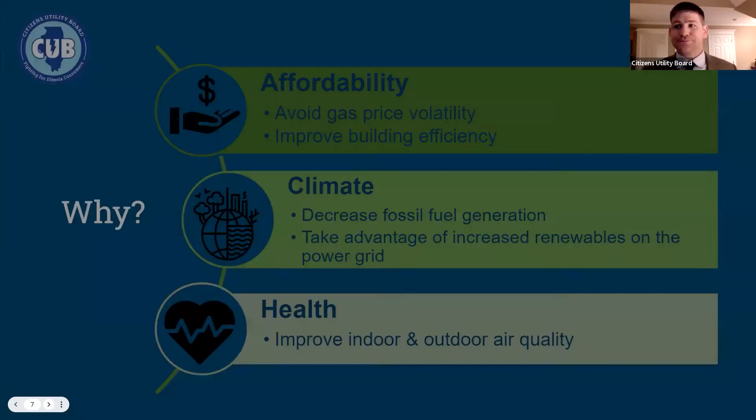As we said, the two main opportunities for beneficial electrification in Illinois are transportation—that's personal and commercial vehicles, as well as public transportation—and then buildings. We could talk about heating, water heating, renewable energy, energy efficiency, and load management. Not in today's brief, but you can also talk about zoning and how that affects the carbon related to buildings.

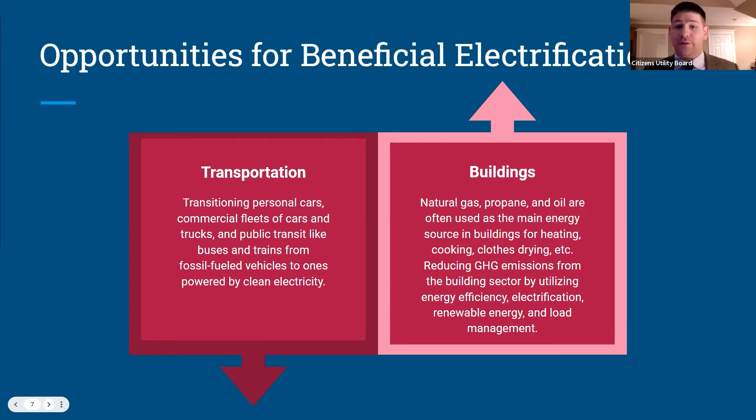So let's get started with electric vehicles. Setting a baseline, an electric vehicle is any vehicle that can drive on electricity derived from a power plug. So any vehicle that you're plugging in would be considered an electric vehicle. There is also such a thing as a plug-in hybrid vehicle, which can use both gasoline and electricity that you charge from a plug. Most of what we're talking about today is going to be the all-electric vehicle, the BEV or battery electric vehicle, that is powered solely on a battery that is charged from a plug.

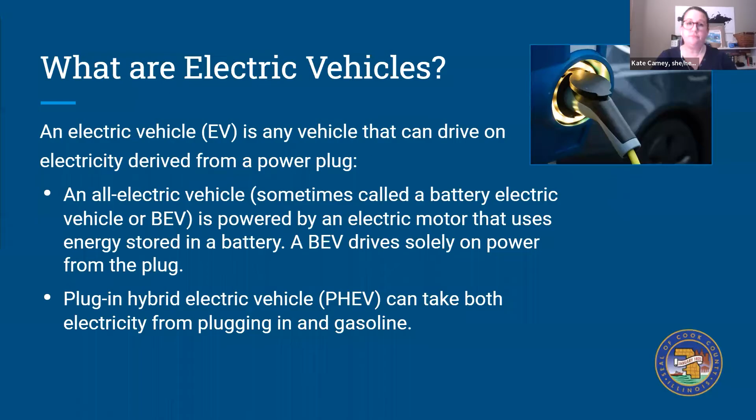There are some key features to an electric vehicle, especially these BEVs we're going to be talking about. Electric motors are usually smaller, translating to a larger interior space and a much quieter drive. Many EVs also have regenerative braking, which helps to slow your vehicle more safely and divert some energy back into the battery instead of letting it be wasted, as happens with a traditional internal combustion engine, or ICE engine. There's also instant torque and no gears to grind, which helps give a much smoother, quieter drive with a lot of get up and go. All EVs go from stopped to moving very quickly and easily.

This is a demonstration of the difference between an internal combustion engine vehicle and an all-electric vehicle. There's a lot less going on at the front of the car, and most of the batteries are at the bottom, giving it a much lower center of gravity, which is useful for a lot of different reasons. Additionally, the motor and everything associated with it are a lot smaller and lower in many electric vehicles, so many EVs have a frunk and a trunk, giving storage space in both the front and rear of the car.

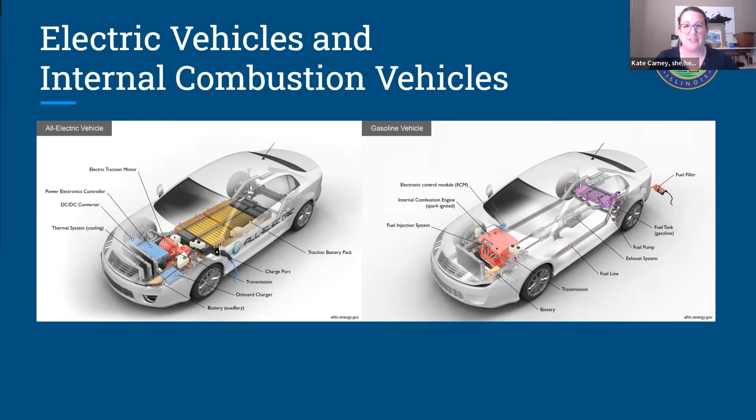So why would we want to talk about electric vehicles? Why does the governor want to have 1 million electric vehicles on the road by 2030? There are a lot of reasons, but the ones that most resonate with us as consumers are, first and foremost, a lower cost of ownership. Many electric vehicles are getting more and more comparable to traditional internal combustion engine vehicles in cost, and there are so many fewer maintenance needs because there are so many fewer moving parts in an electric vehicle's motor versus an internal combustion engine and all its associated parts.

Because of regenerative braking, the brakes usually last longer. There are also state and federal tax incentives and rebates that help further bring down the cost of owning or purchasing the vehicle. The equivalent cost per mile for an EV is a lot less than for an equivalent mile of gasoline. Right now especially, electricity is far less expensive than gas, and since gas is still fairly high, there's a huge difference.

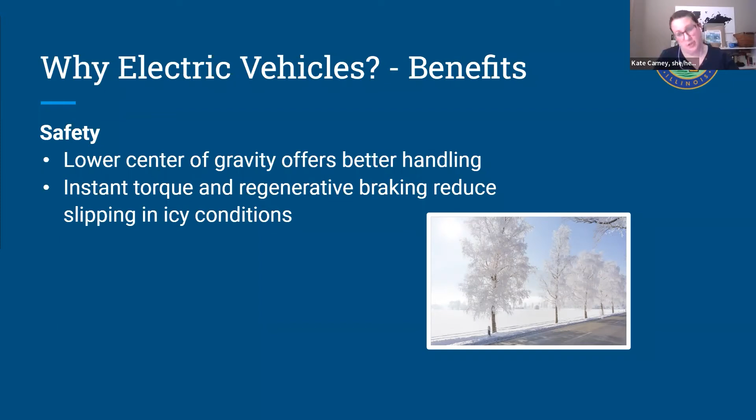Also, they're cleaner—no tailpipe means no tailpipe emissions. This really helps us reduce greenhouse gas emissions and keep particulate matter out of the air we're breathing and out of the atmosphere. These are all components of the greenhouse gases that our tailpipes emit right now: less carbon monoxide, nitrogen oxides, formaldehyde, and particulate matter, which can do a lot of damage to our lungs. This is a really important health benefit to all of us.

Also, there's a lot of charging options. Right now, this map is a rough estimate of all of the public charging stations available across Cook County. They are different levels, which we'll talk about, but this infrastructure is growing every day. More private companies are adding charging stations to their facilities for staff, employees, and customers. Cook County is currently working on a program to try to fill in some of these charging deserts where you see big spaces with no chargers currently. At the state and federal level, there's also tons of charging infrastructure coming into play.

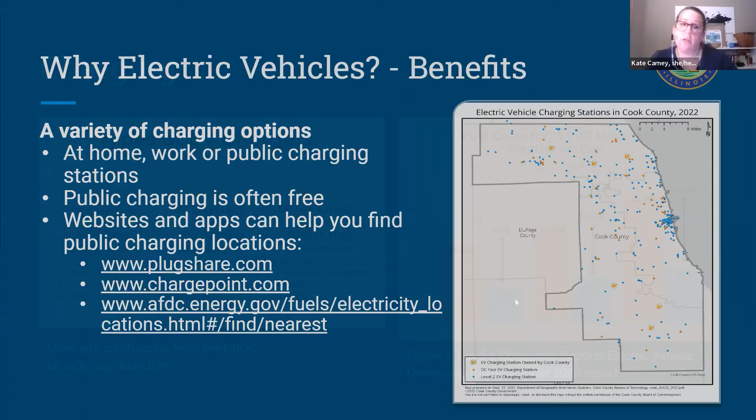So let's talk a little more about charging. There's 3 primary levels of charging stations. The first one is the AC level 1. It is a slower charge, so a lot of people describe it as kind of a trickle of charge into your electric vehicle.

This is best when you are able to just plug it right into one of your outlets, whether it's in your garage or on the exterior of your home. You're going to want to charge it overnight when rates are low and demand is low, and you have time to get your full charge back. A lot of times, if you're just doing your normal everyday driving around, this is going to charge it up pretty quickly because you haven't had to reduce your battery very low. And it's very accessible, it's just like a 3-pronged plug that you find in your home.

The AC level 2 does require that you would need an upgraded power source, but you can have that installed in your house. It's the same thing as an electric dryer plug, that's 220 volts, so it's very similar to access we already have in our homes. This one charges quite a bit faster. It's not the fastest, but you could upgrade to have this in your home, and you'll also find it in a lot of public charging stations.

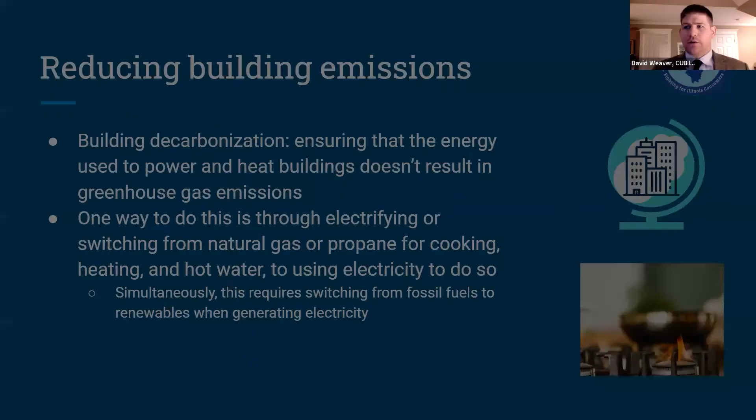There's the embodied carbon when you develop the building. Are we using concrete in the pouring of the foundation, because concrete is one of the largest carbon emissions, and everything that goes into that. We're not going to discuss that today, but it's an important part of the puzzle when we talk about building decarbonization.

Then there's the direct emissions that come from using a gas stove, using a furnace, using a gas-powered dryer in the home. You're literally burning natural gas, or in some places of the country, oil or propane, and that's a direct emission related to the building.

Then there's indirect emissions. That's when you have a coal power plant or a natural gas power plant that's burning fossil fuels and have significant greenhouse gas emissions to create electricity, which is then used by that house. So those are the 3 parts of the puzzle that we want to get after when we talk about building decarbonization.

The first and foremost, the best thing you could do is energy efficiency. The cleanest and cheapest kilowatt hour or therm is the one you don't have to use. If you have really great insulation in your home, it's weatherized, you have really efficient appliances, instead of using 100 kilowatt hours, it only uses 10, for example, that would be significant energy efficiency that can reduce emissions and save you money.

Electrification, which we're going to focus on today, that's switching from gas to electricity. Renewable generation, cleaning up that indirect emissions. Although I will point out that using electricity, even if it is somewhat created from fossil fuels, is still cleaner and more efficient than using fossil fuels to heat your home directly.

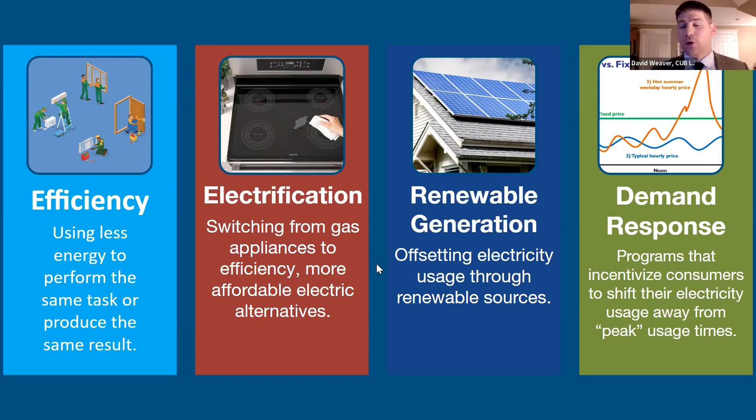So why is this so important for us in Illinois? Well, we like to take a lot of pride in our state and our city, and unfortunately, Illinois is the third worst when it comes to using natural gas. Only California and New York are worse than us, and when we consider population sizes, it's not looking good for us at all.

So why electrify? Well, let's talk about emissions over 15 years. So using a heat pump, you can see the bottom three lines, the light blue, the dark blue, and the green are all different types of heat pumps.

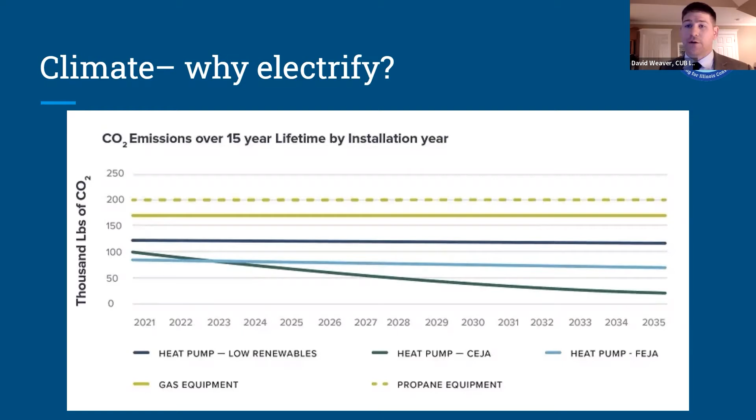The dark blue is a heat pump that's using almost no renewable energy, and it still is going to be much cleaner for the environment than burning natural gas or propane directly. So we can see over the 15-year period, switching to electric is far better for the planet.

Health—we talked about this a little bit at the beginning. A lot of us don't think about it, but when we're burning natural gas in our homes to cook, that flame is right there, and most of us don't have actual vents that take that and move it outdoors. So homes with gas stoves can have 50 to 400% higher emissions in the home than electric stoves. And the most concerning part is children in a home with a gas stove are 42% more likely to develop asthma or other respiratory illnesses.

We tend to think about outdoor air pollution a lot, but we forget to think about what's happening in our home, especially as we better insulate and weatherize our homes to keep the cool or the hot out. We're making it more difficult to get the fumes out of our homes. So it's a pretty significant issue.

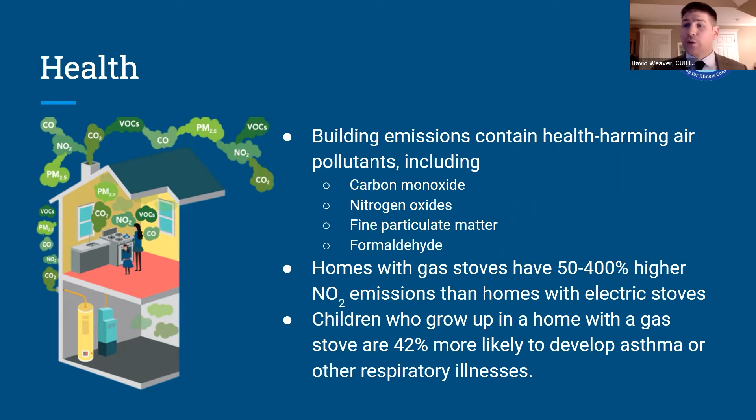There's even talk right now about a federal ban on gas stoves, so we'll see if that actually happens. Obviously, the gas industry is going to lobby to prevent that. So we'll see. But if you own your home and have a gas stove, I would highly recommend you switch to an electric stove, particularly an induction stove. We'll talk a little more about that when we get into incentives, because there's federal money to be had for that.

Affordability—let's talk wallets. As we can see, since 2020, gas prices have skyrocketed, and I hate to be the bearer of bad news, but that's only going to go up.

There's many reasons for this. Part of the problem is people are more aware of the negative externalities associated with mining natural gas. When you mine natural gas, the nearby area suffers a lot of pollution, water pollution opportunities, and an increase in earthquakes. So I think no one wants fracking in their backyard, and as more people get aware of these issues, there's going to be more local resistance to putting a mine near people.

Then there's the global gas crisis going on with the Russian invasion of Ukraine, and climate change and extreme climate events happening—all of that contributes to making natural gas more and more expensive.

And it's only going to get worse, especially because the gas companies, at least in Illinois, are asking for massive rate increases. As of last week, Peoples Gas asked for a $402 million rate hike, increasing rates by 60% since their last one in 2015. Nicor Gas requested a $321 million rate hike, all while they're already making record profits off of our backs.

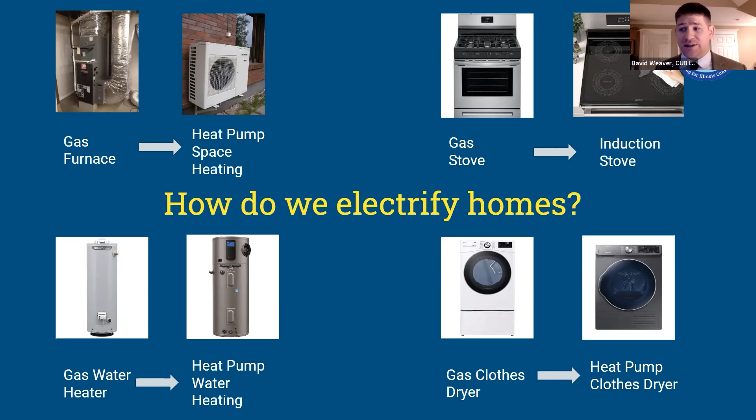So switching to an efficient heat pump, water heater, or geothermal heat pump is a great way to save money and be better for the planet. And the last thing is dryers, switching to dryers that use electricity instead of gas.

So 95% of the time, it's more efficient to heat your homes via air source heat pumps. And the few times that it is colder than -5, heat pumps will still heat your home. It'll just be a little bit more expensive than it would have cost to use natural gas. But 95% of the time, you're saving money from using the electric heat pump.

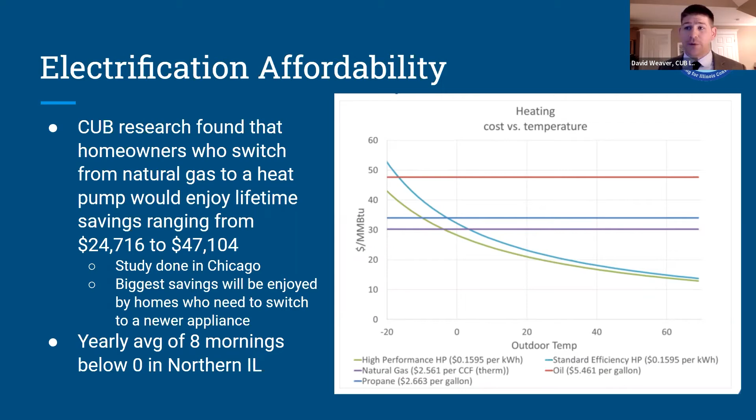So when it comes to deciding how you're going to heat your home, CUB research shows that you can save $24,700 to $47,000 across the lifetime of your heat pump to switch to it. So immense savings.

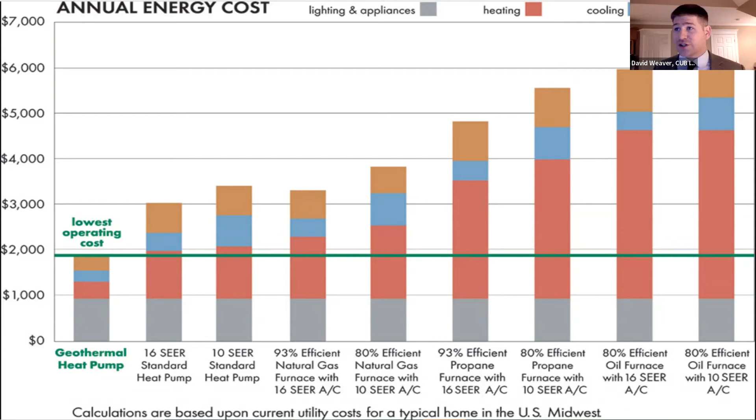Adding in geothermal heat pumps, you can see it's got the lowest operating costs of even the most efficient air source heat pumps, but certainly less than the most efficient natural gas furnaces. So it's just significant savings if you switch to heat pumps.

The IRA electrification rebates. So the Inflation Reduction Act that was signed in August by Congress allocates $263.6 million to the state of Illinois to help low and moderate income Illinoisans transition from natural gas over the next 10 years.

So if you need to replace your furnace 5 years from now, you may not want to replace it now, because this rebate will still be available for 5 years up until 10 years from now. However, it is first come, first serve. So if we, as the state of Illinois, run through all that money, Congress isn't likely to allocate us any more, with the two different parties ruling Congress. So I would encourage you to replace them soon.

If you just bought a furnace, maybe the finances don't make sense, but now's the time to do it, even if you think you've got another 5 years on your furnace.

But if you make less than 80% of that, then you can get 100% coverage of whatever electric appliance you're buying, up to a $14,000 cap. If you're at 150% or lower, then you qualify for 50% off all the electric appliances, up to a $14,000 cap. So a little bit more nuance to how these apply versus just the 30% everyone gets for the tax credits, but pretty important, and that tool is very helpful.

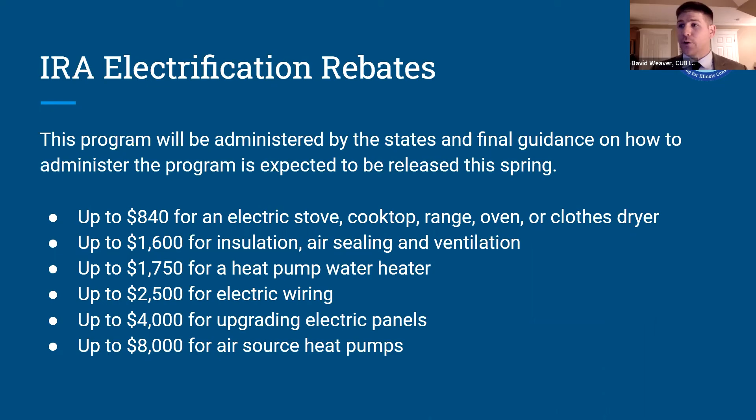Renewable energy - there's also tax incentives for rooftop solar. I'm also going to talk about community solar, even though it's not a part of the IRA. And the IRA also provides incentives for geothermal and batteries.

So rooftop solar - right now I truly believe there's no better place to install solar panels on your roof than Illinois. We don't just get the federal incentives, we also get state incentives. The federal investment tax credit is 30% of the cost of installation of your solar panels, and it is a tax credit. So if you're not making enough taxable income, this might not help you, but if you're making some taxable income, just not enough to get 30% back, you can use some of it this year, some next year. It does roll over, so very helpful.

Then on top of that, the state of Illinois has solar renewable energy credits, or SRECs. This is through the Illinois Shines program, which was passed with the Climate and Equitable Jobs Act. It usually covers between 30 to 40% of how much your system will cost you. So that's 60 to 70% off your rooftop solar panels between the federal and state incentives. It's a no-brainer - this is the time to do it. There's no better state in the union that has this great incentive program.

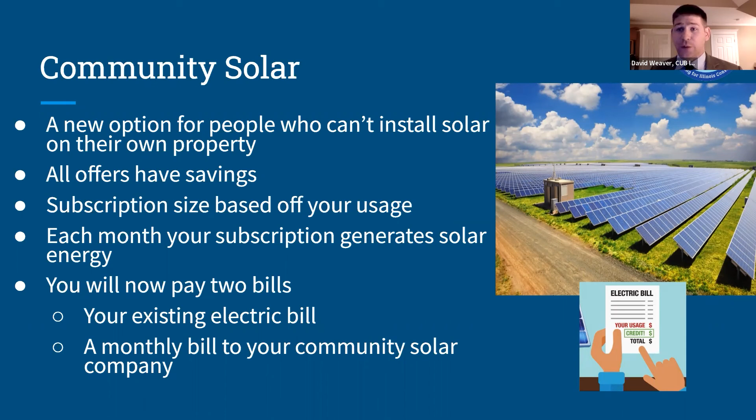Most people in Illinois save $10 to $20 who participate in community solar, and fortunately in ComEd territory, it's very safe. There's a few wrinkles to this program - if you have a municipal electricity source, you really need to check the work on that, and happy to give us a call and we'll talk you through it, because you might not save money if you have municipal solar. That's just the big wrinkle to discuss if you do have that. But if you just have ComEd, then this is a great program for you, and I highly recommend it. Everyone should sign up for this because $10 or $20 every month adds up very fast.

This is what I was talking about - you'll get an electric bill that has minus $50, but then you'll get the community solar bill charging you $40. So you'll save a net $10. It's kind of confusing because you get two different bills, but it'll save you $10 or $20. And if you have any questions, just feel free to call us on our hotline and we'll discuss it.

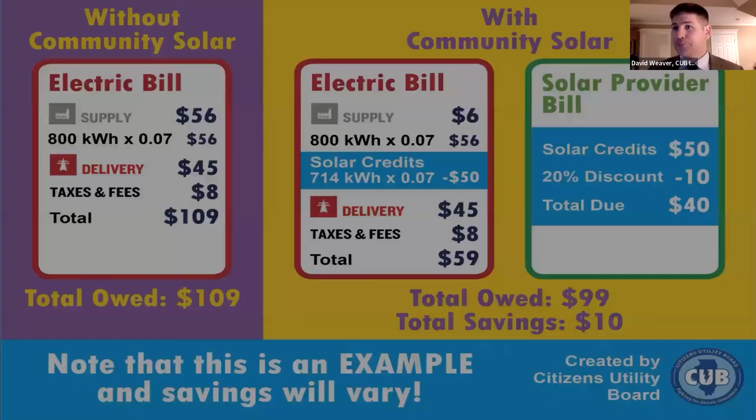Geothermal heat pumps are the most efficient way to heat and cool your home and your water. It uses the energy stored in the ground.

What it does is, when it's hot outside, it works just like your refrigerator, which moves heat outside. You can't create cold using electricity or burning gas. Those can create heat, but they can't create cold. So what it does is move the heat from your fridge and pump it out. That's why sometimes you feel warm air coming out from the bottom of a fridge, that's the heat pump working.

A geothermal heat pump works in two directions. In your house, if it's hot and you want to cool it, just like that fridge, it pumps the heat down and stores it into the ground. Conversely, on a cold day, when you want to heat your home, it takes that energy stored in the ground and pumps it into your home.

It's the most efficient way to heat your home because it's not creating heat, it's just moving heat. The ground stays, at least in Northern Illinois, at 58 degrees year round, a couple feet under the ground. Geothermal systems can go very deep or very wide depending on your yard. You can also use it to heat and cool your water, so in theory it replaces your AC unit, your furnace, and your water heater all in one unit.

The nice thing about geothermal is your pipes are guaranteed to last 50 years, and in Illinois they usually last well over 100 years. It'd be a different discussion in San Francisco or another earthquake-prone place, but we don't have that problem here. The heat pump system itself is indoors, so it's not exposed to the elements like an AC unit is, so they tend to last 20 to 25 years as well.

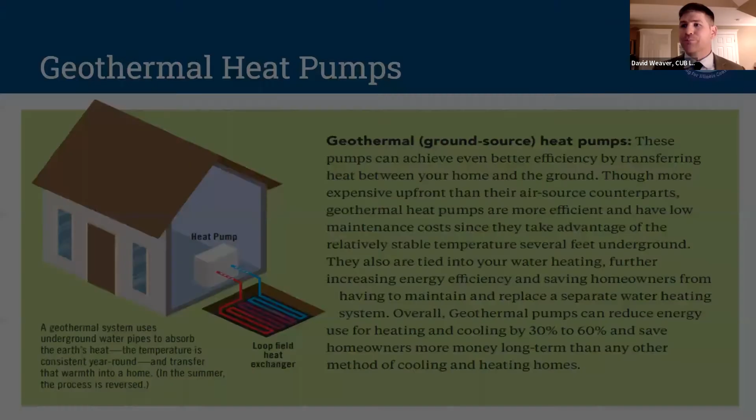So they last longer, they save you maintenance money, and they save you tons of money every month by being the most efficient system. Plus there are tons of great incentives.

For your average home, the upfront cost might be 25 grand. That's significant, that's a big hurdle. However, there's the $7,500 clean energy tax credit, which is the 30% I was just talking about. The federal government will pay 30% of this program and give it to you as a tax credit, which you can roll over multiple years. Then there's the $2,500 home efficiency tax credit as well that can be applied, and in ComEd territory, you can get up to a $9,000 rebate on geothermal heat pumps.

ComEd's got great incentives to steal you from the gas company. If you heat and cool your home via electricity, they know that home is going to be an electric company customer for the rest of that home's life, so they're going to see a return on that over many decades.

So if you do the math with me, this system could only cost you 6.5 grand potentially, with an estimated yearly savings of $1,750. It's only going to take 3.7 years to get a return on investment.

Of course, if you just bought a new furnace or a new air conditioner unit, you may have already gone over that 6.5 grand. So this is a no-brainer system if you need to replace your furnace or air conditioner soon and you have the space for it. If you have a very small yard, it's more difficult, but there are a couple of small rigs in Illinois that can get into really tight spots. So it's worth asking for an inspection and a free quote. It's just a fantastic system.

Thank you, Kate and David. I'm definitely looking forward to getting a copy of this recording because there are some nice links I want to look at. One question, David, on the geothermal rebates and credits: in your example the upfront cost was $25,000. Are the credits and rebates fixed values, or are they percentages of the upfront cost?

The federal clean energy tax credit is 30%, so it's not a fixed value, it's percentage based. The home efficiency tax credit is a fixed value.

Great question. I'll also use this opportunity to plug Citizens Utility Board, along with the Geothermal Alliance of Illinois and the Midwest Renewable Energy Association, who are currently designing a group buy for geothermal heat pumps. The more people who participate, the cheaper the heat pump will be for each participant. We're looking to launch that in April, so stay tuned on our website, join our newsletter, and we'll provide more information to help you save money on both geothermal heat pumps, and there will also be a different program for air source heat pumps.

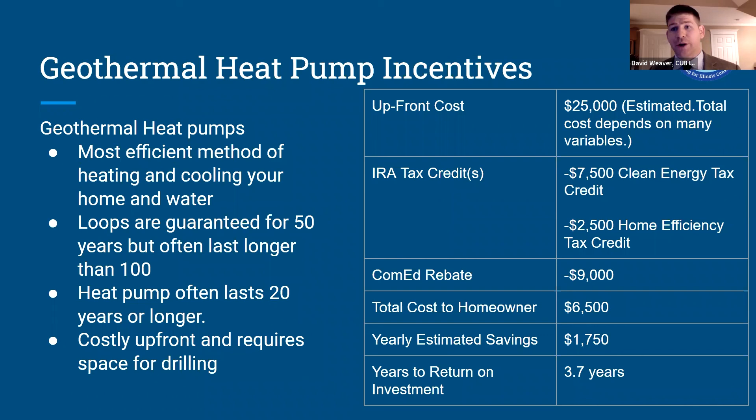On top of that, every year for the last six or seven years we've been doing a solar program that begins in the spring as well, to help people save money on solar panels. Cook County is very excited to co-sponsor, so we will help make sure that group buy program, both the geothermal and heat pump program and also Grow Solar, are accessible to all our Cook County residents.

Yes, Cook County is a strong ally and a huge supporter of this. It was my mistake not to include them in that. I just want to make sure we help try to make sure that all the great work CUB and the other organizations are doing is accessible to our residents. That's all I was adding. So just keep an eye on it; between CUB and Cook County, we'll make sure that info gets out.

One other question on the geothermal: is there any information out there on either recommended vendors or just a general vendor list of geothermal contractors?

Yes, really great question. My recommendation is to go to the Geothermal Alliance of Illinois' website, and I'll put that in the chat window here in a second. If you go to their website, they have a page listing all of the certified installers in the state. GAOI does a really great job verifying who's doing it in the state properly and safely, so you can trust your installer. I just added the main link for Geothermal Alliance, and right away you can click on 'find a contractor.'